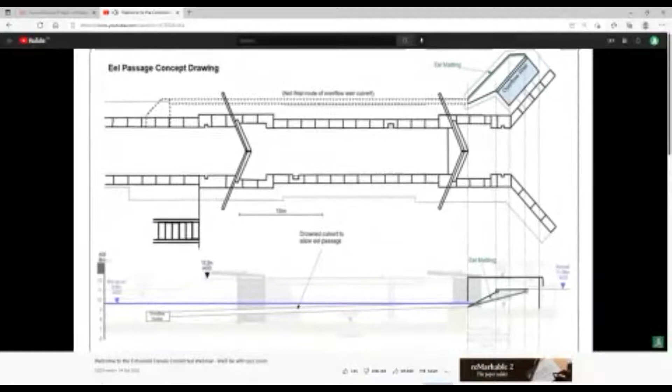By working with the engineer team, they've actually come up with a novel design solution where we're fitting an eel pass as standard in a submerged culvert, and they're really proud of that. Quite a lot has been done at the design stage to make sure the restored canal offers the best opportunity for the environment.

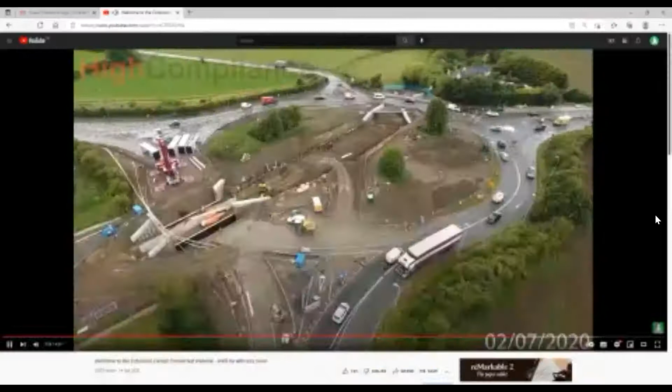We're trying to avoid hard engineering where we can. The main complexities are the bridges. We've got 3 major bridges: the rail bridge, the A38 roundabout, and another public road bridge as well. That takes up something like two-thirds of the total cost of this project.

The creation of this link to connect the already developed Phase 1A with the Gloucester and Sharpness canal will create a fantastic destination that will now be accessible to boaters right across the English canal system. It will be such an exciting prospect for people to come and enjoy this new section of canal, to go into the beautiful countryside around Stroud and visit that sort of destination. I'm sure it will be a great draw for people.

I think there's a nice feeling with the canal that this is really owned by the people of Stroud. It's our canal, people are very proud of it. If it's not going to be done, it's our heritage that we'll lose. We just can't let it go, can we?

Welcome to the Cotswold Canals Connected project. That was a video we prepared for the National Lottery Heritage Fund to help us win the bid for this major project, and we were awarded that contract by the National Lottery. We won the bid, which was great.

We now move from the planning stage into the delivery stage. Myself as the project director, Glenn Dooley as the engineering manager, and Anna Tarbert as the Environment Manager are going to give an overview of the project and what it means for you and the communities that you live in.

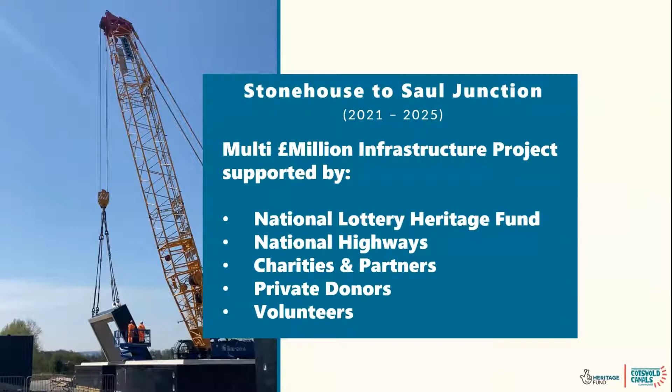So what are our goals and objectives? What is it that we're trying to achieve? For this project, we will be scrutinized by the Heritage Fund to make sure their money is wisely spent, and we achieve transformation - real change, economic, social, environmental change that's going to leave a legacy for the future, one we're proud of for future generations. There are 5 strategic goals, 5 outcomes we're trying to achieve.

And the first one is about creating places. That fundamentally is about restoring the canal, linking Stroud to the national network at Saul. But as we do that, renovating and enhancing our heritage - we've got a very, very rich and proud heritage, and we want to very much embrace that and include that as a key part of this project.

The next outcome is around working with nature. Anna Tarbert will talk a little bit more in detail about what it is that we're going to do to conserve, protect and enhance the wildlife, the habitats. This is also very much linked to biodiversity net gain and also our targets around being carbon neutral in the future, so it's going to all work towards that.

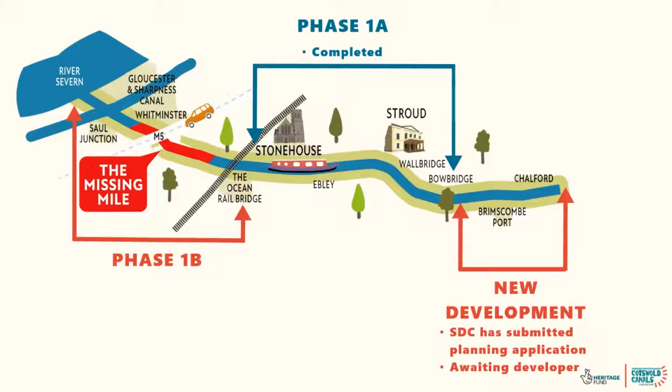The phase 1B project runs from the Ocean Bridge through to Saul Junction, and Glenn Dooley will talk a little bit more about that project and what's involved with phase 1B.

I also don't want to forget what's happening at Brimscombe Port. You would have seen that there is a planning application, and we are about to award a contract for developers to go and restore the canal at Brimscombe Port. Once that development is complete, we will still need to connect the canal from Bowbridge to Brimscombe Port, and the next phase of this project will be to secure the funding to get that piece done.

So that's an overview around the project. What I'll now do is hand over to Glenn Dooley to talk about the engineering piece. But before I do that, we're going to see the time-lapse video, a 90-second time-lapse video of the amazing feat that was run by Network Rail over the Christmas and New Year period to build a new bridge within 7 days.

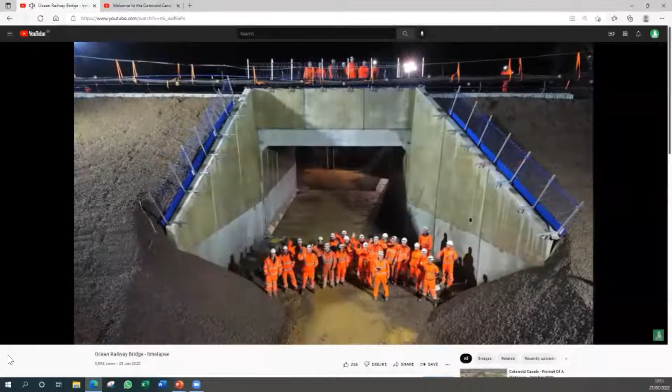Good evening, everybody, and thank you for attending the webinar. Hopefully you would have been impressed by that short time-lapse video of the Ocean Rail Bridge. If only we could build the whole project that quickly.

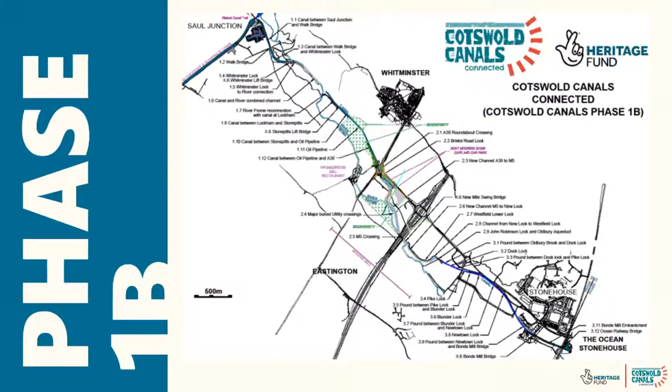What that 7-day time-lapse did not perhaps portray is the 3 years of planning and preparation that was undertaken prior to that. We still have a few weeks of work left on the site till we actually get water back into the ocean. That project is one of approximately 40 sub-projects that we've got along the whole of 1B.

As has already been mentioned, 1B is the bit that we require to connect up to the national canal network, and really to fully realise the investment that's already been made along section 1A.

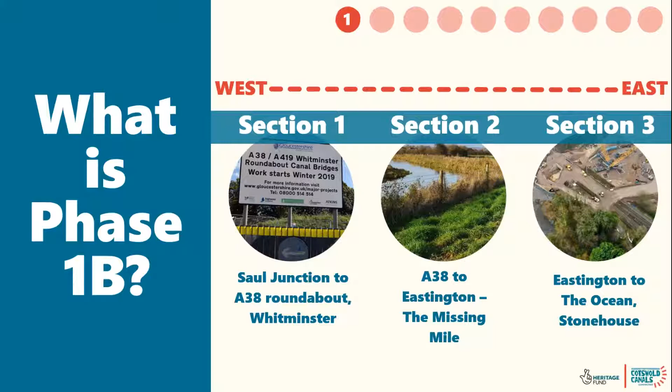So the projects within 1B fall into 3 quite distinct sections. Working from west to east, we have section 1, which is the Saul Junction to the A38 roundabout works. Section 2 is known within the project as the Missing Mile - this was where the actual original canal infrastructure was lost as part of the development works undertaken on the M5 in the late 60s and the adjacent local highway network. And finally, we have section 3, which is from the Eastington end of the Missing Mile through to the Ocean Rail Bridge.

The projects within 1B fall primarily into either restoration - this is where the canal infrastructure exists in one form or another, some elements are quite sound in their existence, and other bits we do have quite a bit of restoration work to do - or the other element of the project, those projects that are new build.

As you can see here, we have the A38 roundabout on the left-hand side and the Ocean Rail Bridge on the right. These are significant engineering projects undertaken by other providers. We have a vast amount of volunteer resource available to the project, but there are some elements where we do have to call in professional skills.

One of the key things these slides show is how we can improve health and well-being and access for communities along the canal corridor. This is very much a volunteer-delivered element of the project, and we have skilled teams that can go out and turn the existing, slightly muddy, treacherous underfoot towpaths into something suitable for multi-user trails.

These towpaths, because of their historic nature, are somewhat constrained in width, so where we can, we're looking to provide the best opportunity for multi-use. Cyclists can use these towpaths as well as pedestrians, so whilst they're not perhaps to national standards, they do provide a much increased benefit and opportunity to get out and explore the canal network.

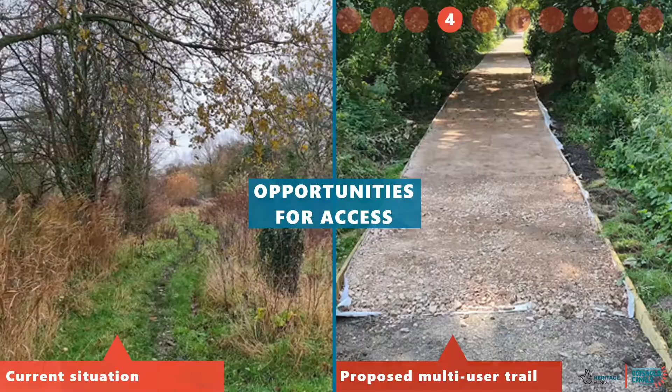The project offers, through the variation of either restoration or new build, some quite unique opportunities. It's not often somebody is building a new canal - this is probably one of the first in 100 years where we're looking at restoring the missing mile. So we have a unique approach in how we're delivering the major civil engineering elements.

We're working very closely with Network Rail and Gloucestershire County Council Highways on elements of the project where we need their input. But it does provide vast opportunities for local communities to get involved through volunteering, and they've had opportunities to provide input through workshops held prior to the Heritage Lottery bid, where we listened to what communities would like to see from the delivery of the canal restoration, and we've incorporated those where we can into the projects we're now seeking to deliver.

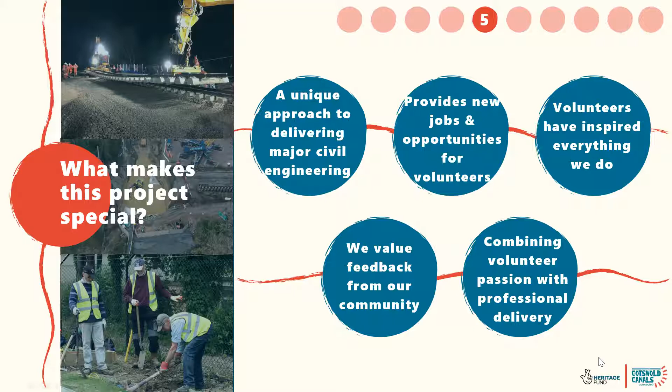Working slightly backwards here, picking up from the Ocean Rail Bridge - this now links and will provide navigation into phase 1A. The Ocean Rail Bridge was a significant constraint to navigation, and that will now allow us to start undertaking other elements of the project, including dredging of the canal and preparation of the towpaths as we've seen.

We have in section 3, 5 heritage locks to restore - again, a key volunteer-delivered part of the project. We have a new lift bridge to put in at the Bonds Mill Trading Estate. The bottom photograph shows the existing lift bridge, which was unique in its delivery - it's a fairly recent bridge.

It was installed in the mid-90s, so not that old, but it's already part of the heritage in the fact that it is the first composite plastic highway bridge installed in the country, and we have work to do to bring it back into service.

The middle photograph is an excellent bit of history on the project. This is the start of the missing mile - that is Westfield Bridge. In front of that, believe it or not, in that grass, is John Robinson Lock, which is to be restored.

The bridge was saved from destruction as part of the M5 construction works. They proposed that this bridge be blown up, but a local resident's daughter stood on the bridge and prevented the engineers from destroying it, saving a wonderful piece of our heritage. We're very thankful for the actions taken all those years ago.

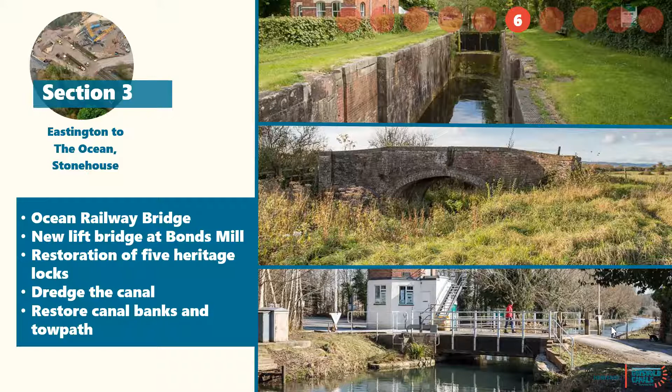The missing mile - the top left-hand corner there by the A38 roundabout, you can see a little bit of the blue existing canal. We've now constructed the section through the A38 roundabout, bringing us into the start of the missing mile in earnest. Here we have to construct a new canal channel, 2 new locks, a mooring basin, and also get underneath the M5.

Thankfully, as part of the M5 works when it was constructed, the crossing for the River Frome was provided, and it's something we're now looking to utilise by sharing the river crossing and putting the canal channel in alongside it. We have a slide later on that shows that in a little more detail.

The work in the missing mile is a great opportunity to provide a new biodiversity aspect, and I've worked very closely with Anna, who will be speaking shortly, to maximise the green-blue corridor opportunities through the missing mile.

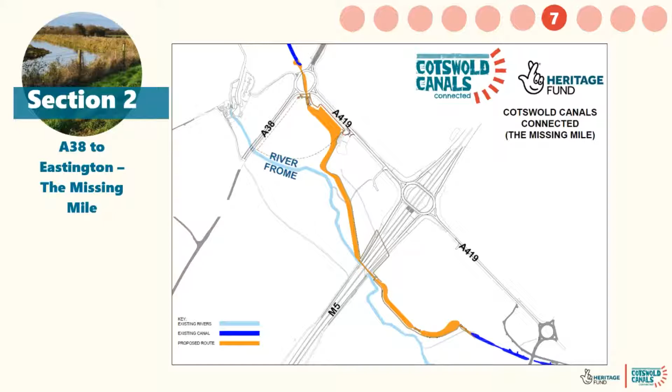Not very clear on the slide here, but the top right image shows how we are going to construct a new concrete channel within that existing opening where the river passes through. The headroom above river height to the underside of the bridge deck isn't suitable for navigation, so our normal canal water level will be about a metre lower than the normal river levels.

That will provide the headroom for us to navigate underneath the M5. The sketch at the bottom right shows the new Hydes Basin that is to be constructed close to the A38 roundabout, providing moorings for approximately 44 vessels, and will be a key part of the project.

All the engineering work we're undertaking is being funded through the sources that Chris highlighted earlier. Obviously, the maintenance of the canal once we've restored it is going to rely on income generated from the canal, and the revenue from the mooring basin will significantly contribute to future maintenance costs.

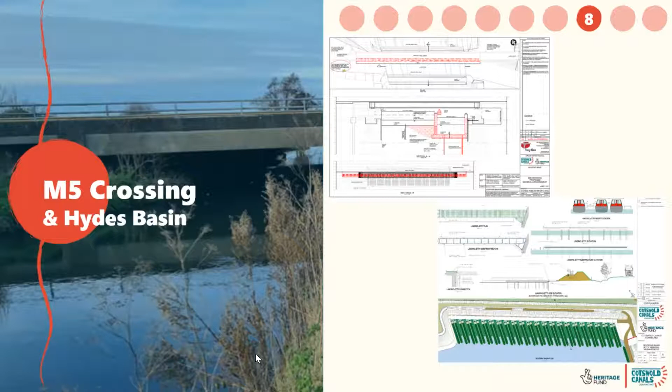We have a proposal with the pipeline operators that they are going to directionally drill a new pipeline on the existing line underneath the canal, and they are due to be on site late summer this year, about July, maybe August. That will reopen navigation.

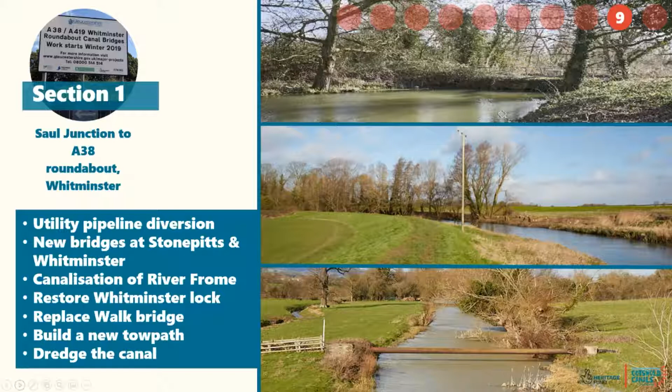And that is my last slide, so on that note I will hand over to Anna.

Thank you very much, thanks Glenn. I think you thought you were going to steal my thunder then, but I think you got away with that. So I think we're good. So whenever you're ready with the slides, Amy.

Okay, hopefully I've met some of you along on the webinar today, but I'm Anna Tarbutt. I'm Environment Manager for the project, and I work at Gloucestershire Wildlife Trust.

The Wildlife Trust have been involved in the project since the beginning of the development phase. We've really steered all of the work taking place in the delivery phase, and worked closely, as Glenn mentioned, with the engineering teams and other teams to try and design a project that will deliver for the environment as well as for people and heritage. And that involves lots of things.

If we can go on to the next slide, please, Amy. This really just outlines the work that we've carried out to date and is still ongoing.

There have been a lot of protected species surveys, some of which we've had volunteers involved in, and that will be ongoing over the course of the project. So we've got a really good idea of where we've got species that we need to avoid if possible, or mitigate for impact against, and that will continue across the entire delivery phase, so we've always got a really good idea of where different species are. Some are very mobile, so it's ongoing across the project delivery phase.

I just wanted to spend a couple of minutes explaining what we mean when we talk about embedding environmental principles in design. I think bioengineering and nature-based solutions are words that are coming up a bit more recently, and they're not always the most obvious what they mean.

So what I've tried to do here is I've got an image just taken from Instagram of what probably most people think is a normal canal, what canals often look like. You can see it's very hard edged, lots of concrete, and I guess that's what most people think a typical canal should be like.

But where we are now, because as Glenn mentioned, we're in an unusual situation in the fact that we're getting to cut a new section of canal for the first time in over a century. You don't often get to build new sections of canal, you restore them, but the fact that we are digging a new section means we've been able to give some really careful thought to the shape of it and what profile it should take.

So rather than having your traditional steep sides, we're going for a much wider canal with a more trapezoid shape, which means that on some of those edges we can have a nice reedy fringe. This really allows the canal to act as a corridor for wildlife, so things can move up and down it easily. It doesn't have that hard edging, so plants will grow into it, animals can burrow into it, and it allows all of those things to coexist.

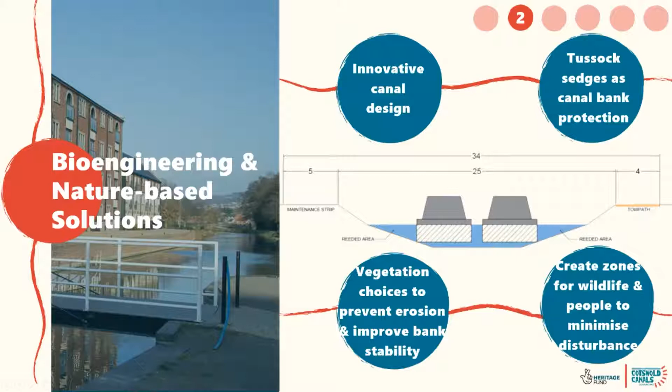And then just going on to the next slide, she says. Oh yeah, there we go.

For anybody, I'm assuming most of you are probably quite local, but it's a very low lying area of land. It's flanked by the River Frome, which is very flashy, so it rises and falls really quickly. So we've got wide floodplains in this area, and this project has really been designed to maximise and expand on the existing river corridor.

So we'll be putting a new watery corridor through this bit of the landscape, and there's a great opportunity there to really link those in together so that species that move along one can move along another.

So quite a lot of thought has gone into which species we're going to be putting in and which habitats. We've got grazing marsh and some scrapes that will be going in on the floodplain section, which should make this area much more attractive for wintering wildfowl and waders.

We're restoring a traditional orchard, and we've already got an active work party there on a monthly basis doing some of the restorations. We've got a species-rich grassland going in and a washland, which will be a much more connected area of land with the river than it is at the current time. So lots of things going on, and this will all be used to calculate our biodiversity net gain.